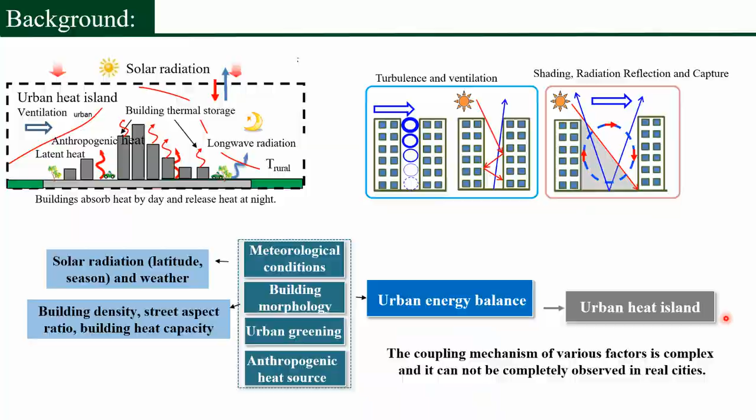because in a real city we cannot describe anthropogenic heat accurately and we cannot measure heat storage directly. So as a result, there is a problem with surface energy balance observation. That is, its uncertainty is large.

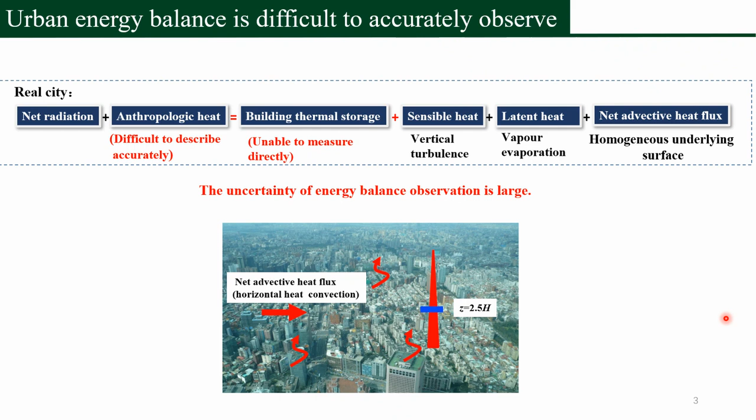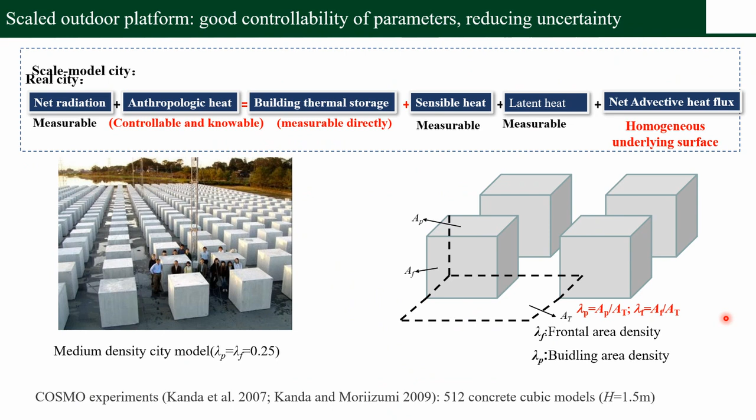However, in the scaled outdoor platform, we can control the anthropogenic heat, and we usually neglect it, and the heat storage can be measured directly, and the net advective heat can be set as zero because the underlying surface is homogeneous. This picture is COSMO, conducted by Kanda in Japan.

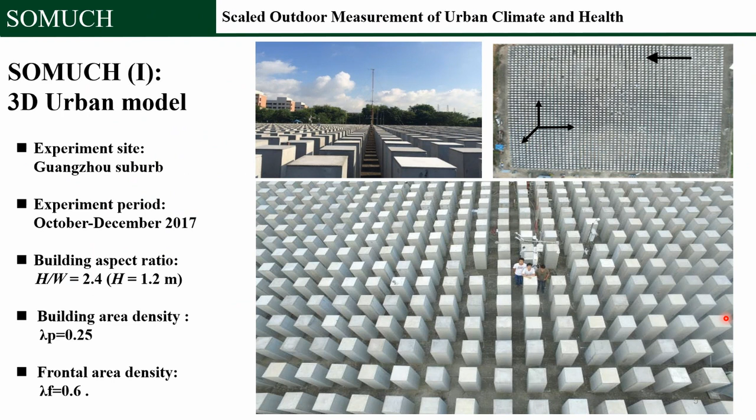So we also established our own scaled outdoor platform. We call it SOMUCH. SOMUCH means scaled outdoor measurement of urban climate and health. It is located in suburban Guangzhou, and this picture shows the 3D urban model.

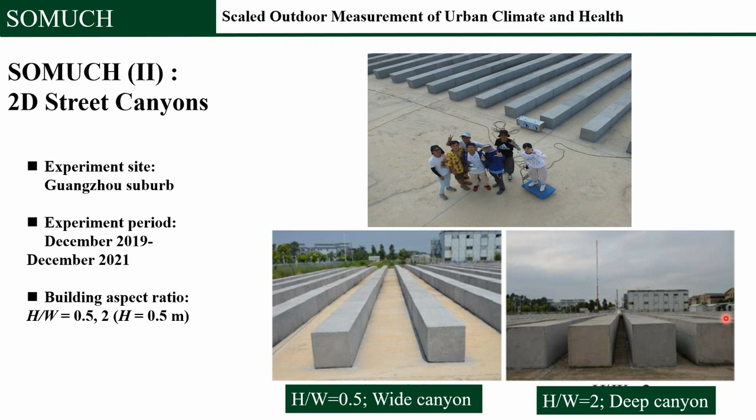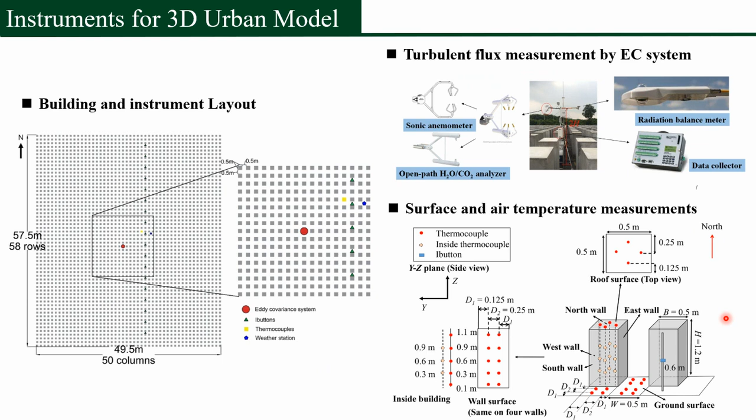And we also measured the surface temperature on roofs, on walls, and on the ground. And we also measured air temperature inside the building block and outside the building block. And the temperature sensors were placed at different heights and measured by thermocouples and iButtons.

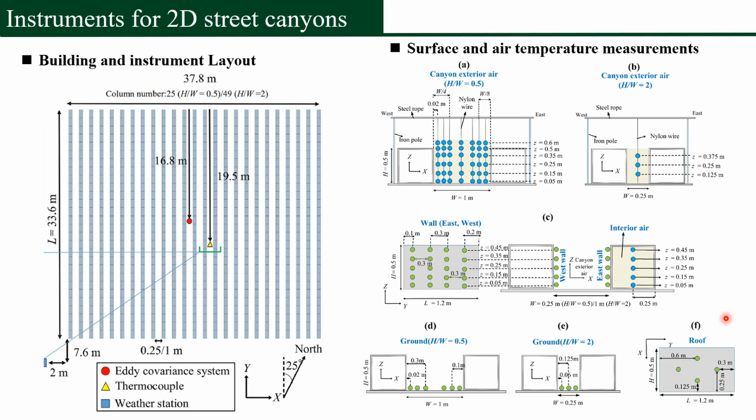This is the building and instrument layout for the 2D street canyon. Same as the 3D urban model, we also measured turbulent flux, air temperature and surface temperature. And we use a method called the ESTM method to calculate heat storage. This method is based on overall surface temperature measurement.

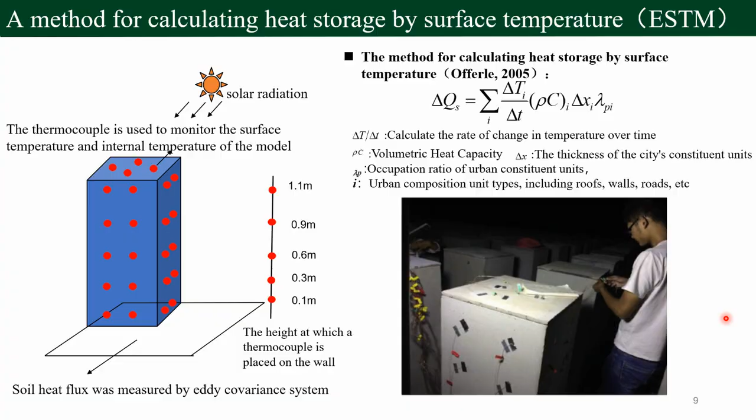And now I'll show some results. First is the daily temperature in different building units: the water model and the hollow model. Water model means we filled the building model with water, and the hollow model is empty. And we found a critical parameter influencing the surface temperature, that is solar radiation.

So you can see the temperatures of the east and west walls peak at different times. And for the water model, at midday, the roof temperature is the highest. But for the hollow model, the south wall is highest because the solar elevation is less than 45 degrees in December.

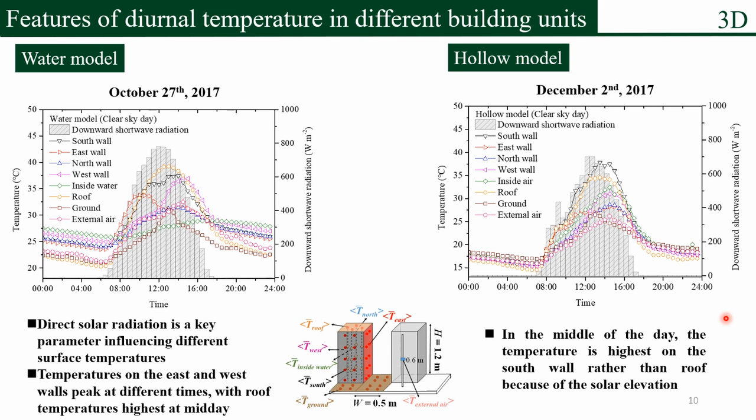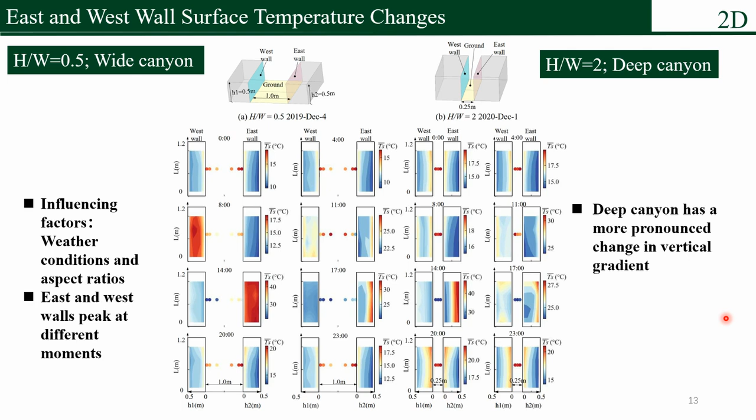And we also show the 2D street canyon results, and we found two important influencing factors, that is weather condition and aspect ratio. And you can see the deep canyon has a more pronounced change in vertical gradient. And we also compared the air temperature inside the building and outside the building, and we got this result.

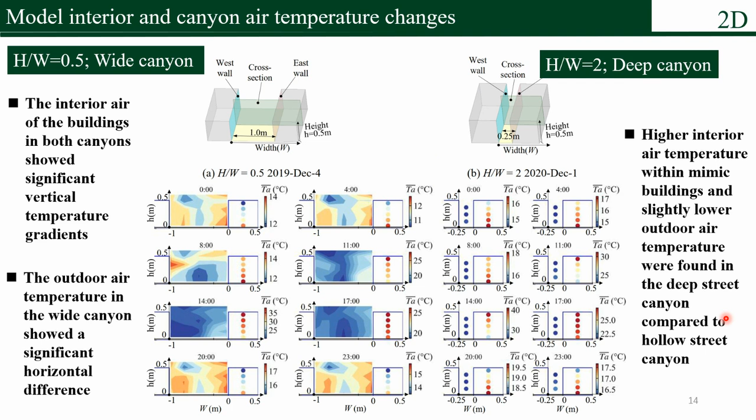Indoor air temperature in both canyons shows a significant vertical temperature gradient. But in the deep canyon, the indoor air temperature is higher, but the outdoor air temperature is lower for the deep canyon.

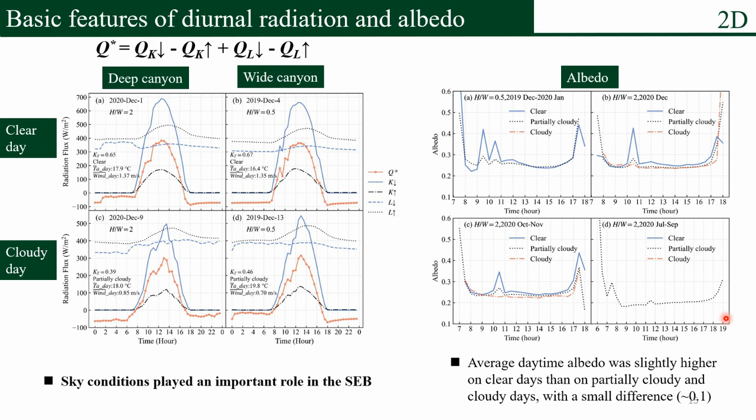We compared the daily radiation and albedo under different sky conditions, and show that the sky condition plays an important role in the surface energy balance, and also show that albedo was slightly higher on the clear day than on the cloudy day.

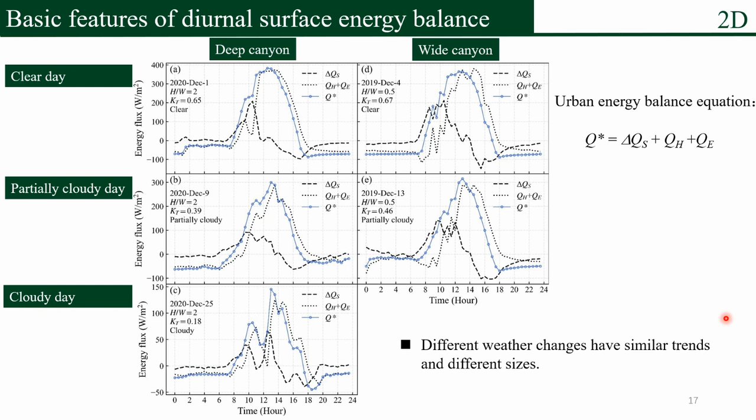And finally, as we know, there is a hysteresis between the heat storage and the net radiation. And we also call it a lag effect of these two terms. And we know that it's quite different under different sky conditions and different aspect ratios.

So the result is the dependence of heat storage on net radiation is stronger on clear days than on partially cloudy days. And the second result is there is a stronger lag effect in the wide canyon compared to the deep canyon.

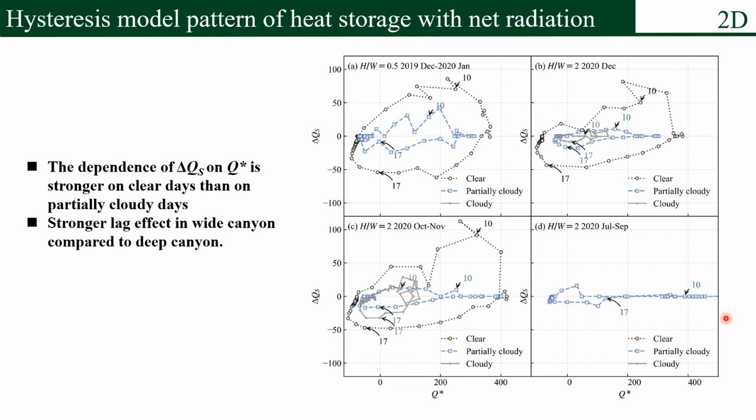Let me simply summarize the conclusion. That is, our scaled outdoor experiment has some advantages. It has good controllability and can reduce uncertainty of urban surface energy balance. And we got some basic physical characteristics about urban energy balance

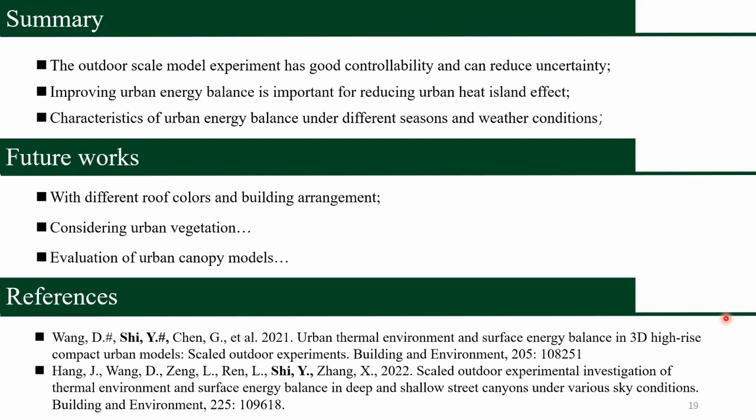and temperatures. And in the future, we will consider more surface colors and more materials, and we will also consider some vegetation. Actually, some of this research is ongoing, and we will use it to evaluate some urban canopy models, or evaluate CFD results. And these two papers are related to this presentation.

And actually, this scaled outdoor platform was established by Professor Hang. So if you want to collaborate with him, or you want to evaluate your models using this platform, you can send an email to him directly.